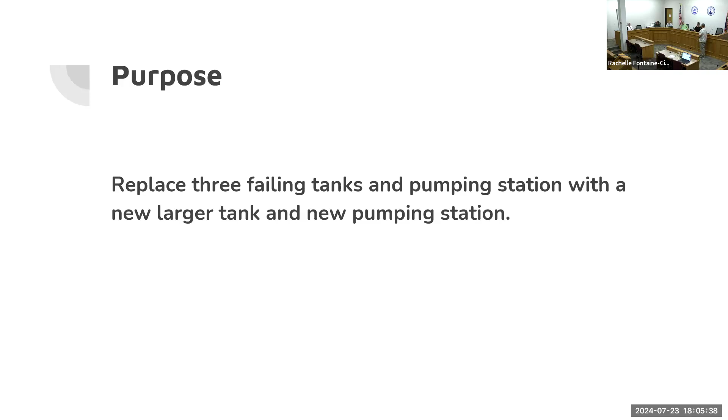That sent us after emergency funds with Wyoming Water Development, on the path of figuring out, can we put a new lid on these tanks? What can we do to keep our infrastructure intact? And ultimately came up with this plan of replacing 3 existing tanks with 1 tank, and we gained 1 million gallons of capacity by adding 4 million and losing 3.

The pumping station helps provide that backup between our higher elevation tank up by the water treatment plant and this new tank at Mortimer Lane. In between there, mechanical valves help flow and regulate pressures, and operators can manually override that system if needed. The pumping station will be automated. So if something were to happen in the hospital zone or that upper area, it should automatically close valves, boost pressure with this new pumping station, and keep that area in service.

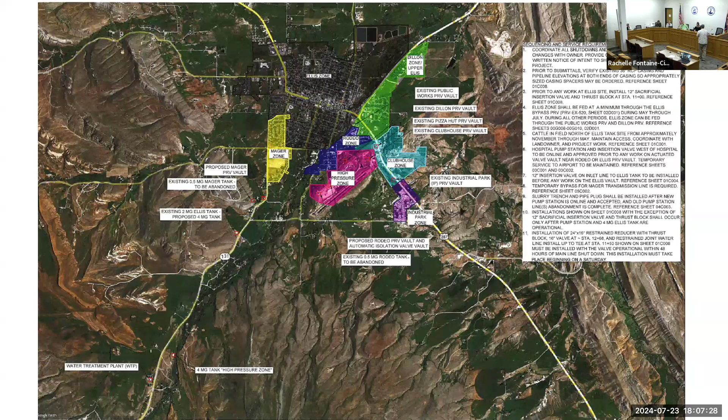Hospitals are supposed to have multiple connections to zones. Ours has multiple connections to the same zone, and that wasn't real good when we looked at it. The existing infrastructure is also a problem because it was only meant to serve just the hospital, and it actually feeds a whole large zone in that area. So just trying to correct some issues as we go through these projects. Go ahead, John.

Yep. 2-day supply, depending on time of year. Yeah, if that. And so right now, water treatment plant is making about 5 million gallons a day. And so we're using more than 4, so less than 2 days.

If something bad were to happen, we would try to call timeout as quickly as possible. That involves calling our 10 major customers saying, hey, we need you to stop. The majority of that water being consumed or used, I guess, is irrigation. So 1 to 1.2 is our consistent number that we see in our community during off-peak times. And then the rest of that is what we're putting on our lawns and public spaces.

Yeah, it is. So project scope, as we look at this, this slide doesn't show well on the TV. What we're looking at is in the far bottom left, that's where the new tank is going in. As you look in other areas, there's sections of little pieces of line that have to be built to replace sections, increase sections, keep customers in service, and automate the system.

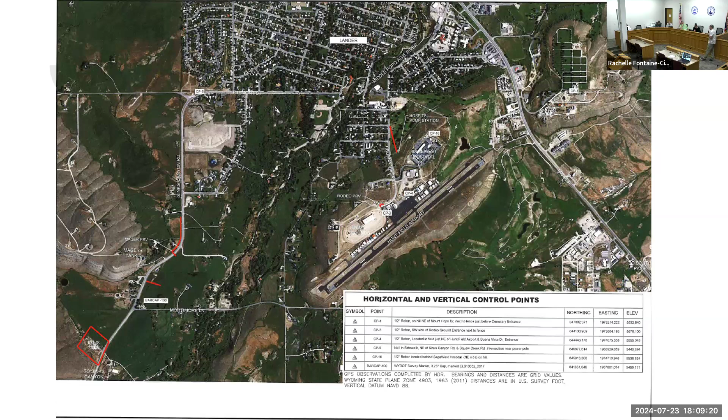So even as you look by the community center and the golf course, that piece of pipe that got bored underneath the canal is replacing old faulty pipe that we know leaks underneath that ditch in that area, and then connects back into Buena Vista near Capitol is what's happening there. And then that pumping station is sitting below the hill as you start to see the building being built.

So current construction contract price. So 9.5, that's roughly where we are with High Country to date as we're paying our pay estimates. Our grants that we've received for this project, the abandoned mine lands, 3.5 million, Wyoming Water Development is 7 million, but we have engineering fees, other things that we pay for than just construction.

And we're still trying to work through some of the logistics of the projects on connections, because we need to work with the landowner on finalizing an easement, which I'm hoping to bring to you next month to bring in another piece of the project that we have a bid on.

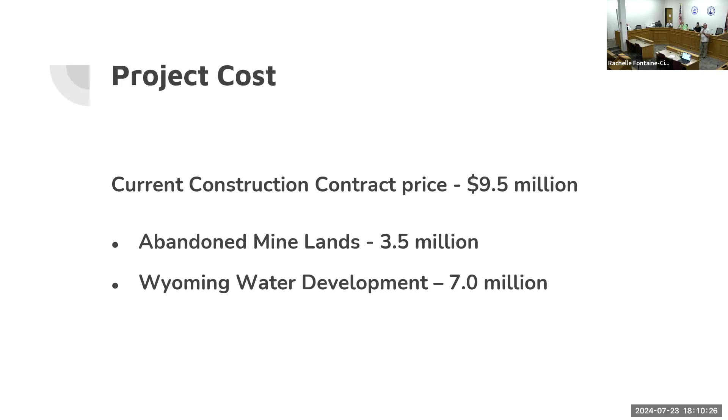So we're going to be real close as far as breaking even on this project or a little bit out of pocket on the enterprise funds between the grants that we've already received and where we'll land on the state monies that are helping us out. So pretty awesome on a project this big that we're sitting on $10.5 million worth of grant, 9.5 in construction.

And the lines coming in and out, there's valves that control when the tank fills based on elevation and controls we can override, as well as pressure valves that take that pressure from that tank being twice as tall, cuts it down so that we don't serve more pressure to the north end of town than we ever did before. So we should always be serving a consistent pressure like we did.

So doubling the height doesn't mean that somebody's calling us and saying, I'm getting more pressure on the north end of town. And the north end of town does get very close to 100 pounds of pressure. So we're always checking that, trying to not let anything creep up too high on us.

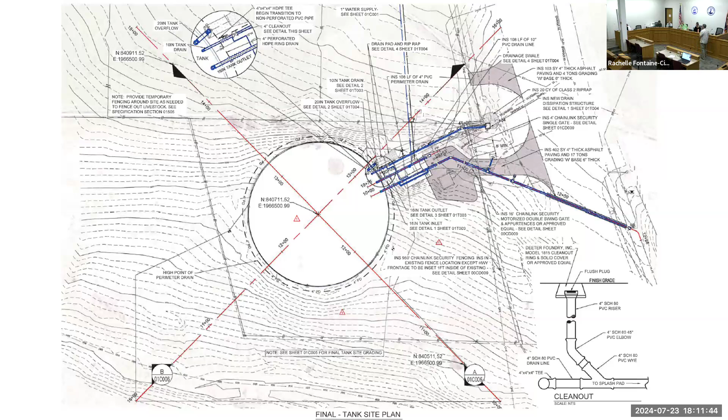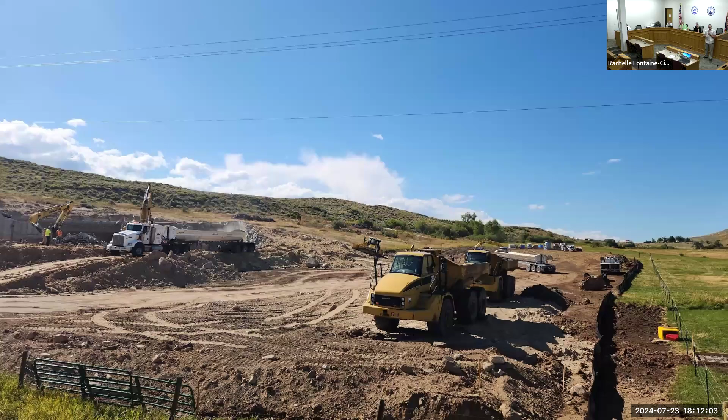So we're starting the demo. This is building the pad next to the tank. Everything has to be level. The excavation materials that were taken out around the tank were put in to build that elevated area. And the goal was to get that very flat for all the concrete pours that are coming.

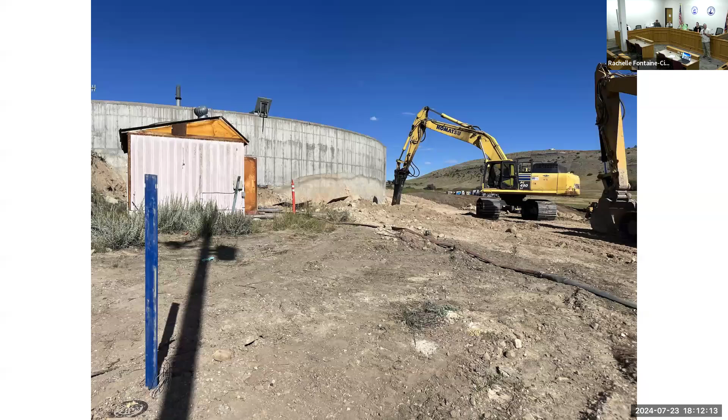So this is more of that construction. And you can see that the tank is starting to be taken down at this point. And this is the Ellis tank, obviously, that I'm talking about, but more construction and deconstruction, I guess, is the walls are coming down and we're seeing the concrete removed and hauled off.

I think that one ended up going to contractor. A lot of times those materials can be broken down and recycled. And so I don't think that they took that over the scale. I think their goal is to keep that in a yard somewhere. We offer some of that ourselves as far as our concrete pile, but this one was, I think that the contractor was responsible for it. So I can ask Chad Connell what he did with that.

So we've got our flat pad built for construction, and they're starting to import materials. The rock has been blasted out. So there were several dynamite sessions out there where they were blowing up rock and removing it under supervision and getting the area to excavate out and build the tank.

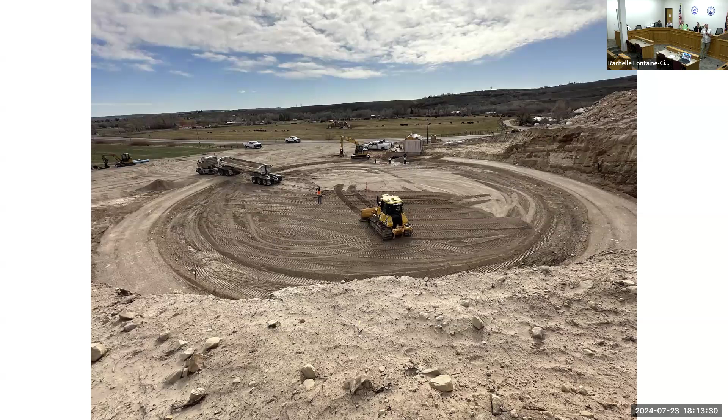And now they're importing the structural fill under the tank. Very important that that's solid and not moving anywhere. And as we see them importing the materials, they're working that into the tank design. So, we progressed into importing those structural fill materials.

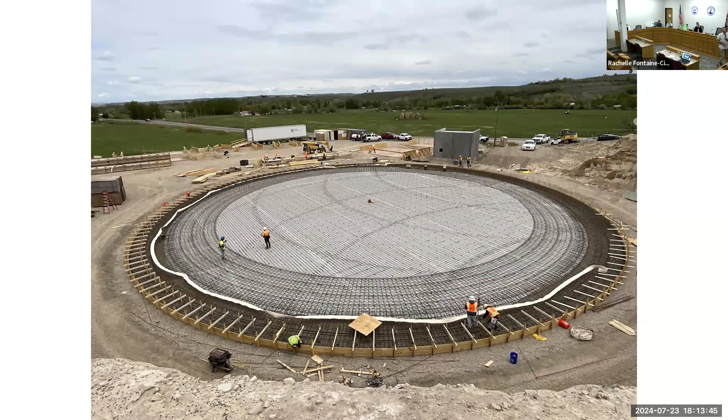This is rebar starting to be placed with waterproofing underneath it, getting ready for the concrete pour, water stop on the outside. This crew out there is amazing. I mean, it's the same group, the subcontractors, DN Tanks to High Country on this project. And it's the same guys from start to finish.

And they all know their role in each piece of what they do. It's not that they brought in concrete people, they brought in rebar people. They just brought in people who know what their role is for that part of the process. And then they move on to the next part of the process.

So we're on to pouring the floor all in one continuous pour in one day. They're pumping it and continuing to finish, moving rails. It doesn't even seem like they're talking, but everybody knows what everybody's supposed to be doing out there. Ooh, I would have to get back to you as far as the volume of that one.

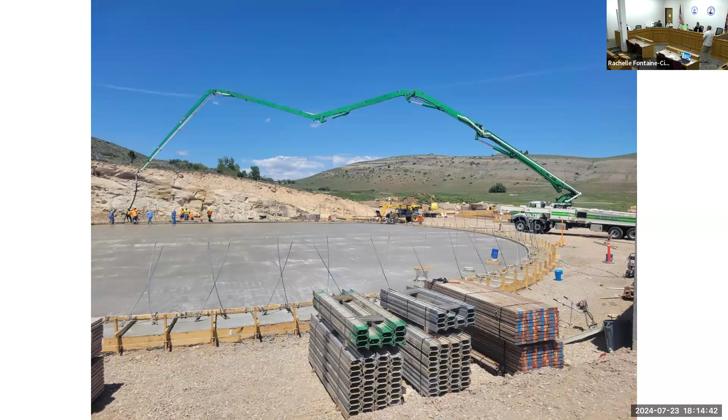So we're finishing up the pour at this point. Then they flooded it for curing, for additional strength, and to have water on top of it while it's set up for strength. And then they're starting to set up their scaffolding, and the scaffolding is to support the structure that they're going to be putting around as they work.

So you can see on the outsides, there's reinforcement strands that are going to be tied to the outside of the tank at some point, water stop, and a really impressive floor. Scaffolding starting to be put up and working through the process.

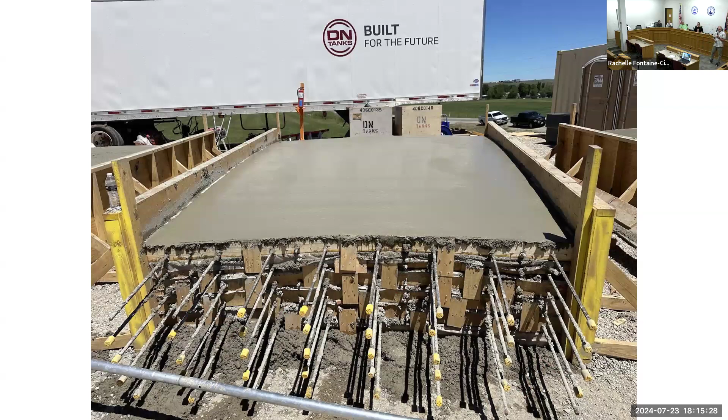So this is great. I guess I didn't really know how they were going to do this, but what they needed that level surface for was that they came in, they bought all new lumber, and then they formed out every piece that they were going to put up on this tank. They didn't bring in existing forms. They put in, shaped the bottom of the pour that they wanted to pour, tested it out.

And then you can see the yellow on this box. Well, that's a portion of the roof that they want to keep an idea of what it is. They pour the first one up to a certain elevation that's marked out on the boards. It's reinforced. They tie the next layer of reinforcement for the second one, and they're just stacking one piece on top of the other and building the same piece over and over and over again.

And they're tracking each thing that goes into the place; they know by the color when they get the crane in where that goes. And so these are set up all around the site in different places, of different sizes, with different knockouts, different purposes, and did everything on site as they're putting up forms and doing other things. So there were continuous concrete pours going on almost a daily basis of pouring another level once they were ready.

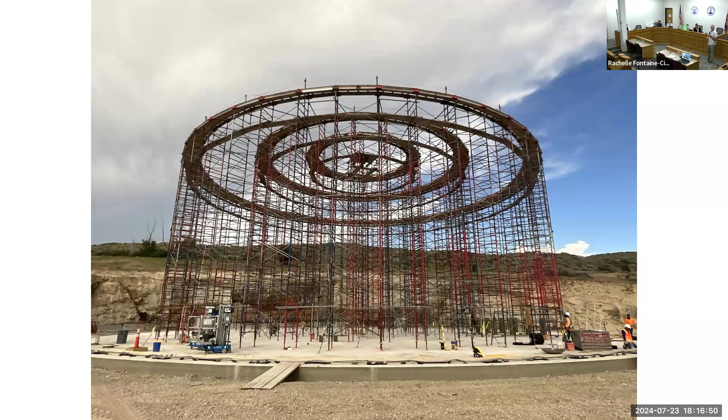So this is the scaffolding that's up and ready for the crane to start coming in. And this is them taking those pieces after they've cured and starting to use that crane. I think you guys saw that giant crane come to town, probably the biggest one Lander's seen, I would imagine, or at least to my knowledge.

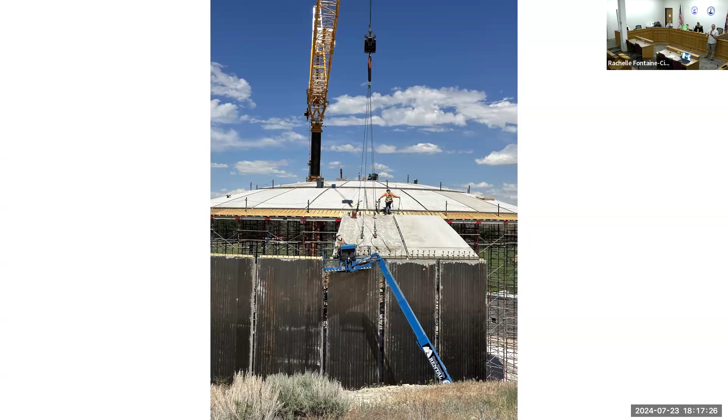And they're building the sides, placing them up piece by piece, and then putting the roof, leaning on top of the scaffolding as they go. And there's small gaps in between each piece that they'll come back and address later, but just laying out like giant Legos sitting on the structure.

I think that crane came in 3 different trucks, and the counterweights to reach the distance that it does was pretty amazing. We were told after we bid this project originally that there was going to be significant savings if we had worked through getting an easement by the tank contractor. Well, the tank contractor is only one piece of the bid, whereas the site work and everything else that happens there comes into a total bid.

So when we put this back out for bid, we did it as an alternative because we thought maybe we'd have to buy an easement, depending on how much money would be saved working with the property owner to be able to use a much smaller crane and be able to work around the tank more, or using a big crane.

And that's where we got down to that like $10,000 difference of not making it worth our time to go purchase an easement for this project. But it was amazing how tight that was when this crane is, I think, $1,000 an hour is what I was told, the subcontractors billing them. So they were very motivated to get this off of site before the 4th of July. So they were told they couldn't go home until all the walls were up and every piece was set.

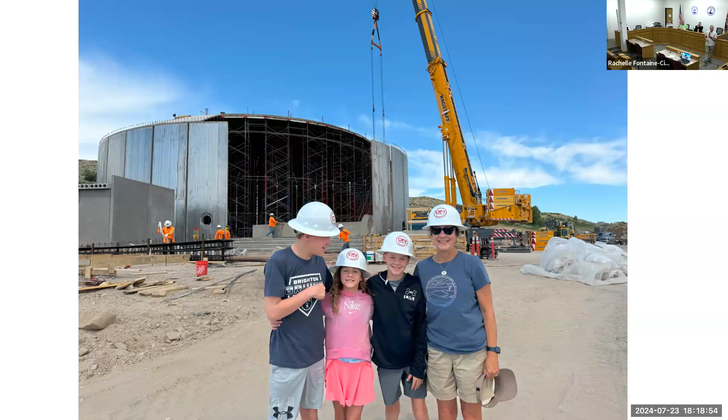Yeah. Yeah. And the contractor's been great.

This picture is my 2 kids, my mom, and then my nephew Garrett. And so I was able to take Garrett out here. He loves things like this. And I think it was the highlight of his 4th of July visit was to come out here. So every time I talk to him now, he still asks about the project. Deanne was great to let us do a site visit. And I don't know if I'd be in Lander if it weren't for Garrett and some of the family things that happened to our family. So pretty awesome to share something like this with him.

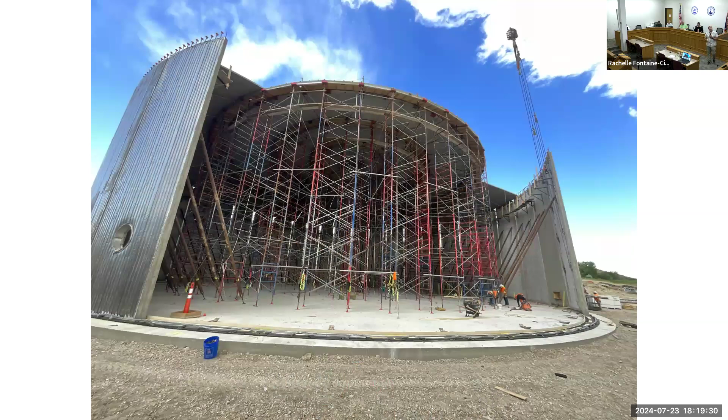So we're still putting up pieces. This is inside. So I didn't get to take this picture, but the engineer did, as far as what it looks like with all that structure and all that roof structure placed.

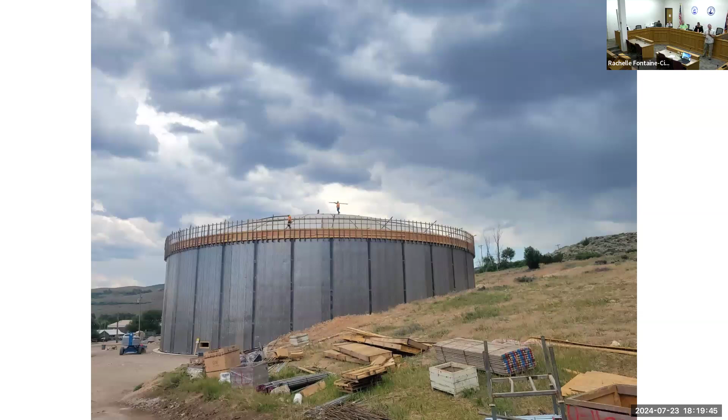Go ahead. No, you asked away. This is what this is about. Yeah. Yeah. Yeah. Oh, yeah. I mean, okay.

As far as safety, security, and all that weight on top of it, it's amazing, and at this point, they've put up and they're sealing the joints. They're getting ready for the upper pour. So they're going to start pumping concrete in all of the joints and all the pieces and in between them. So that wood structure around the outside is safety, but it's also holding a concrete edge pour. And then as you look at the metal, it's epoxied down in between each vertical piece. But then on the inside, that's secured and bolted, and then that's ready for filling in the gaps. So they're filling in that structure as they go.

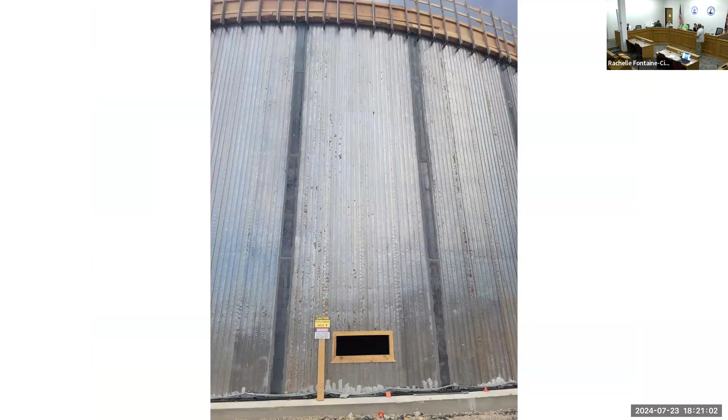And I'm like, how do you get all that scaffolding out of this? Like, I just see the small holes and the penetrations, and they're like, yeah, that's this. And it's the perfect size to take that all down one piece at a time and pass it through the hole. And I'm like, oh, that's going to be a fun day of passing those little pieces of scaffolding outside, stacking it back up, and they'll seal that hole. So that's kind of where we are with the tank right now. And I guess I can talk a little bit more about what happens next.

So as they fill in all those voids, there's actually a bunch of wire wrap reinforcement that goes around the outside of that tank. And it's going to be gauge wire tied into the reinforcement that's there. And then it's going to get shotcreted and painted to finish it all up. And then sealed on the inside. As far as what's going on, they were going to do one more pour to keep sliding from not being an issue against the tank in the back before they backfill it with rock. So we'll see them remove that pad and stack everything kind of back up.

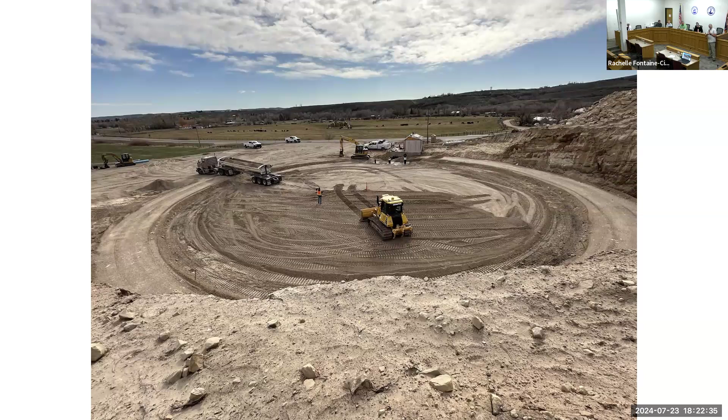I guess some of what I may have missed was the little building in the background here that was being built too. So we had an existing building. There it is. You can see it. It's up in this picture. It's wood structure and it's over a vault. And then we're capping that. It is half underground, half above ground, and we're doing a full building over the top. So they're retrofitting placement walls on that.

And then that will be where we operate this facility out of and where all the valves are and testing for chlorine. And our day-to-day operations will be in that small building that's over the valves. As you see it go up in the back there, pretty awesome. That was just pre-manufactured pieces that were placed down as well. There's roof pieces that go down and then they pour concrete and seal that up in a similar way that they're building the actual reservoir.

I tell you, those guys, Lance, really know what they're doing. I've been really impressed with how that tank went up and what they're doing. I mean, there's no talk. I don't see any talking out there when they're doing stuff. It's just automatic, like a machine. They know exactly what their job roles are. They really like Lander and the people of Lander. I think people are treating them very well as well, which is great to hear.

Well, we want more water, so more storage. Oh, no. Look at that, how we're doing it.

So once this tank is built, let me walk through this next step of the process. This pumping station that we're building is really important as well. And there's phasing to the project of certain things that can and can't happen until this pumping station is built. A lot of that is when we fill or backfeed customers or put in upper zone infrastructure like the control valves, we can't do that portion of the project right now without interrupting our only feed to the

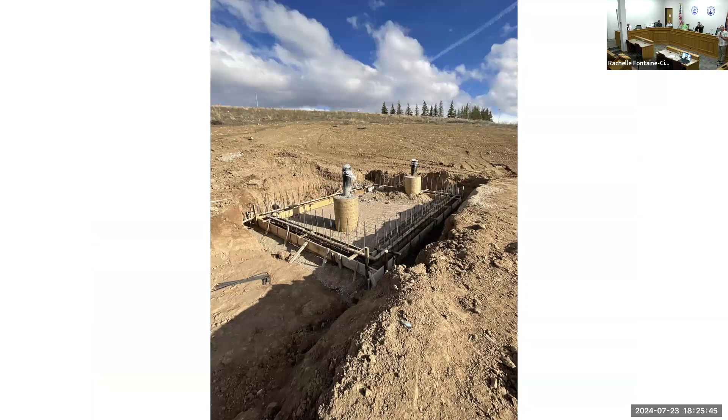So this is the pumping station below the hospital hill. It got excavated. We're looking at the materials in place for the substructure and then getting ready for the concrete pour and the walls. The piping that's coming up, one side goes underneath the canal back towards where the low pressure side is. The other one goes by the canal where the high pressure is in that area. The reason we picked this area is because both of those zones are close together at that point.

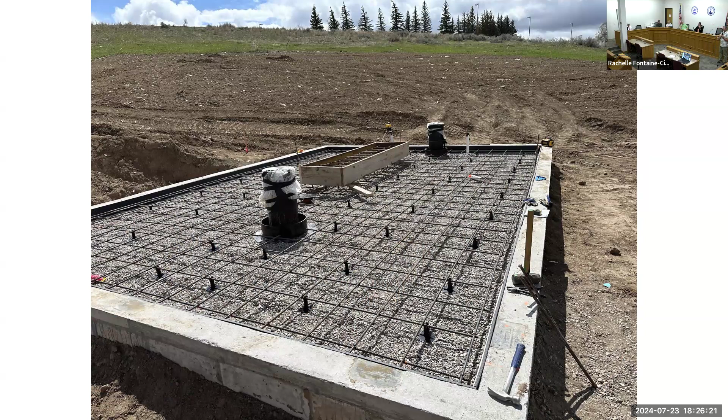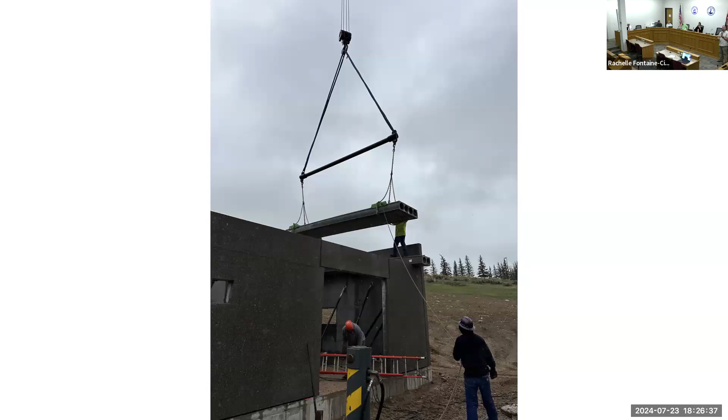So this is where we brought up the grade. It's getting ready for pouring platforms for the pumping equipment to come in. So they poured the floor at this point. It's curing, and now they're setting the building. So it's kind of what you see up there today. Walls are being placed. It's being welded in place. The roof structure is going down one piece at a time. They'll pour on top of that.

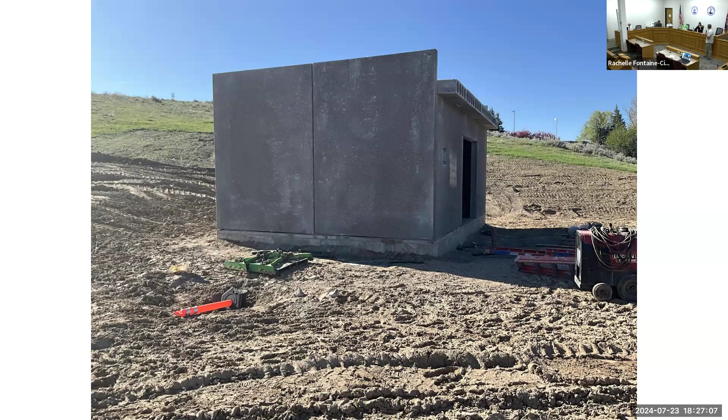But the pumping skid is still moving back in time. It's one of those items we worried about from the very beginning of the schedule, like what piece of equipment's going to be a problem. They said, no problem on getting this to you. It was supposed to be here at the beginning of the summer. It keeps bumping back. Now it's mid-August that it's supposed to be here, and that's still controlling a lot of this actual project schedule as far as when that equipment can be installed.

So that's 4 different pumps. It comes in on a skid like that, and it can keep up with every bit that we can give on the 12-inch line that feeds it. So it's got essentially the equivalent of a 12-inch full capacity line as far as volume.

And as far as what we're serving on that, we have the hospital zone, but it also goes out to the industrial park. And then that goes up to the cemetery. So everything that's up on that hill from the rodeo tank over and down is where we're at. So we shouldn't ever need more than 1,500 gallons per minute as far as demand on it, but it'll keep up with fire flows. So if we need to open up 3,000 out there, it'll do it.

Yep. And they operate based on sequencing, and then they rotate through their cycle as far as what's lead and lag, so that it wears equally essentially and has backup. This one's kind of fun.

So, as we start to look through the system, we figure out what we can control and what we can't control. Realize we wish we had valves in certain areas that we can't turn off and we shouldn't turn off, or we're going to knock a large portion of customers out of service. So this is putting a valve in live. They've got an apparatus that clamps to the bottom of the pipe, the top goes around, and then it cuts a hole out. And then we have a valve where we need it to gain control.

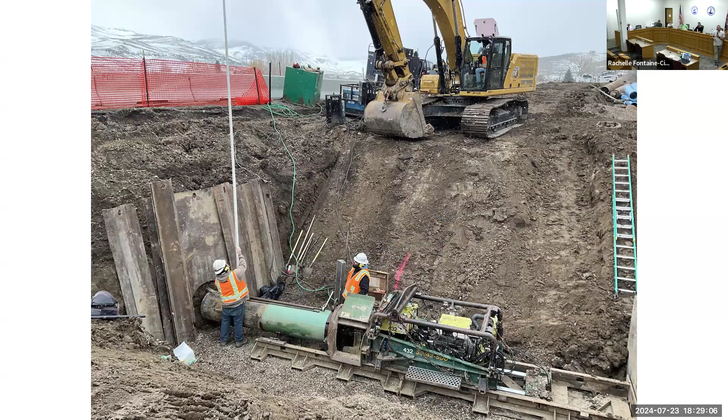This is the Mortimer Lane bore. So we had to put a new pipe where we talked about that pressure reducing valve, where we're replacing the tank on the hill, below Mortimer Lane, the tank that you can never see. It's Mager tank, if you know where that is, but it was on the old Bill's property in that area. And so the PRV vault needs to be placed alongside the highway and is going to replace that tank. So we'll take that high pressure, tap into it, cut the pressure, and serve the same downstream pressure in that area.

So this is as we push the casing pipe and they weld more and then keep pushing on these rails. They get the casing in, and then they can come back and push the plastic pipe inside that casing pipe. And now we have water line inside of that. If anything happens, you can remove that pipe, put a new one in, the metal pipe. So that's kind of the tank and pumping station project where we are to date. Maybe a little bit behind schedule based on materials, but as far as the tank goes, right on schedule where they want to be. Do you guys have any thoughts, questions? You want to talk? Yeah.

Will we be good, or do you see more storage in the future? We had to convince Water Development for our grant that this is more storage than is needed in the equations for a town our size. So we have more storage than what's necessary, so we have some growth for quite a while that we should be able to sustain. Our point back was we live in remote Wyoming, and if something happens, it's exactly what John said. We only have so much time of capacity to get something fixed and get pipe here.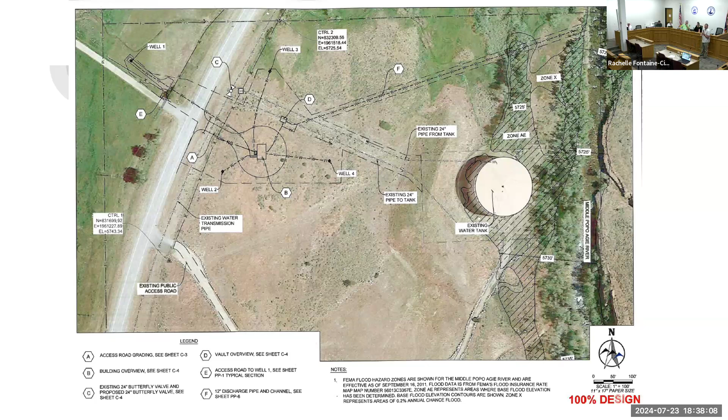So this project, when we started off, getting approval for it, moving forward, getting a grant through water development, we had $1.5 million of estimated costs, what we thought that would be at that time. Right now, we're a little more in line that we think this is going to be a $4 million project. And the reason we're bidding this right now is to get that cost from contractors.

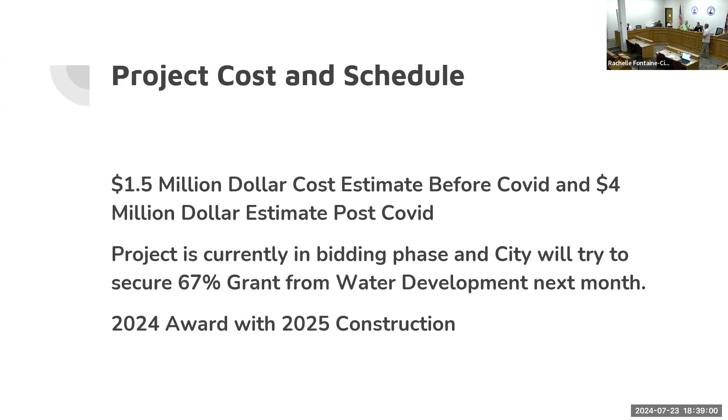There's a meeting in August with water development. They have said that there are contingency funds available for us for that increased construction cost if we're in that window. So we're hoping that we're within that $4 million, give or take, and that we can get additional funding to move on this project still end of this year, getting parts ordered, and then construction next year.

Okay, anything on that last one? Yes. Yeah. And we still have our eyes on some of these ARPA funds, trying to figure out what's going to be available, what type of projects they're going to award those to. But if there's additional funding at all to bring down our actual local cost, we'll keep an eye on it and apply if we're eligible.

So Lander sidewalk improvement project. So this is around Gannett Peak. So we're trying to improve the accessibility and safety around the elementary school. A lot of places that don't have sidewalks, not ADA friendly, traffic issues, access issues. So we started out with a nice rectangle, hoping that that would cover all the things that we wanted to do around the elementary school.

Went out for bid with this project, quickly found out that our grant of $500,000 wasn't going to cover actual costs. We bid this one, had one contractor who was interested. It was a $1.5 million bid, but they didn't meet the DBE requirements WYDOT has for this grant. So we've pared this project down.

Here's our scope and all the streets that we were trying to do, to a much smaller area, kind of cherry pick the most important pieces and the pieces that aren't part of other infrastructure projects such as Cascade and Fifth Street that we're working on or have other funds for and have designed for. And so we focused on kind of that Sweetwater, Seventh, and then the entrance.

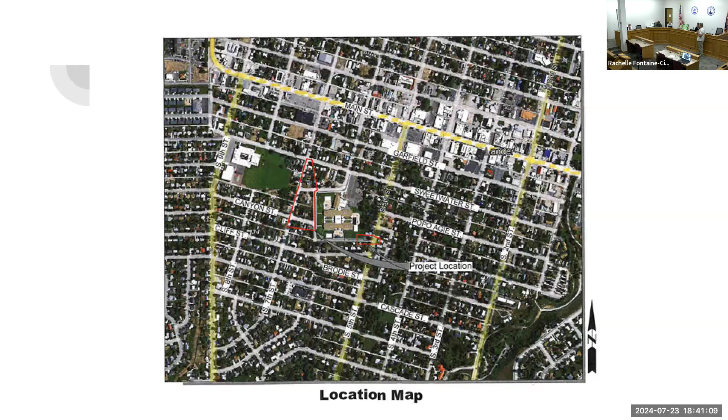So we're back out for bid on this project. We had a mandatory pre-bid. We only had one bidder who showed up again. And we called contractors and said, hey, what's the deal on this one? And they're like, we'd be more interested in November. And so we've hit pause on this because this is next year's construction anyway.

We're going to change the bid date to later in the year. And then we're going to do another mandatory pre-bid and see if we get more interest. But we really want to see competitive bids on this project, at least 3 different contractors who would be interested, if we can get there. But when you have all these big projects going on, all the ARPA funds that are out there, infrastructure money, these smaller projects aren't necessarily as appealing as some of the bigger ones.

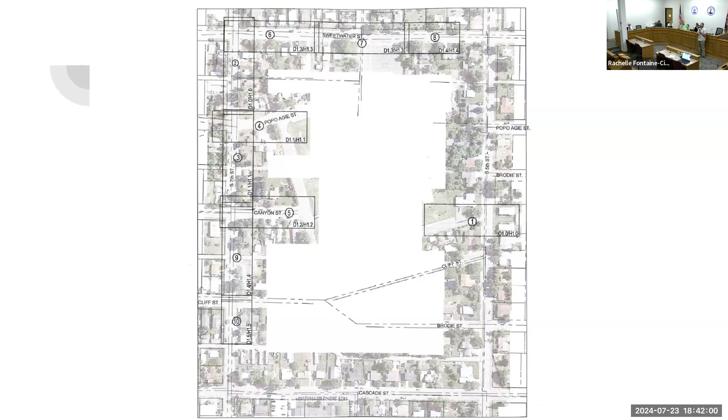So Lincoln Street, we're almost ready to finish our agreement and contract to get that one going. I think that the contractor at this point is interested in doing some repair work for us this year. I'm not sure that they're going to dive into full-on water line, sewer line, underground work still this fall, but they have that ability. So if it meets their schedule, which is High Country, who were saying, hey, you can postpone some of that work on the tank.

Maybe you have another project that you want to tackle, where First Street freezes up on Lincoln Street for us, or 9th Street on the other end, or where we're seeing constant water line issues, or where we know there's bad sewer lines. So we'll have our pre-construction meeting. We'll kick off with them and get a more detailed approach of how they want to tackle this project. But the majority of the construction, I'm guessing, is going to happen next year rather than the end of this year, just based on their schedule and project timing.

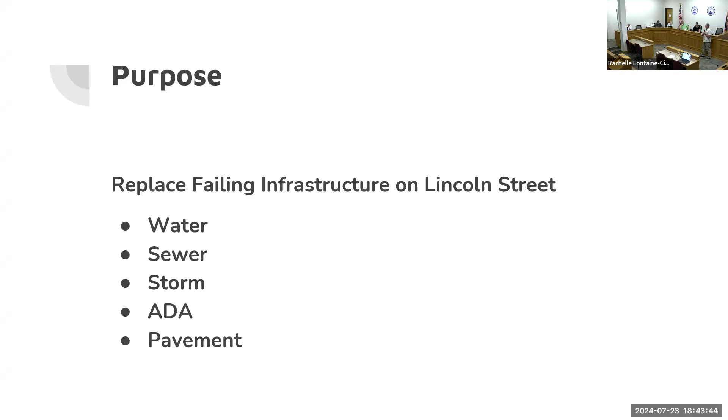So Lincoln Street: water, sewer, storm, ADA, and pavement. It's not complete replacement. We left anything and everything we could to try to lower the overall project cost. And just to give you guys an idea, the overall bid was 7.2 million, and we're talking about 9 blocks. So pretty expensive as far as infrastructure goes to take on these projects and to find the monies, even when you're trying to salvage as much as possible to get things fixed.

This was just a design piece, so the blue is the water line, the green is the sewer line, and just the different components. The yellow is just the sidewalk portion that we're replacing. The white is curb and gutter and sidewalk we're leaving. Each sheet was evaluated with that same thought. Any place we could line versus removing sewer, we kept it in, and we're just going to put liner inside the sewer. So this isn't a full-blown, go through everything new project. This is still trying to be somewhat conservative, and construction costs have really changed from 5-7 years ago to today.

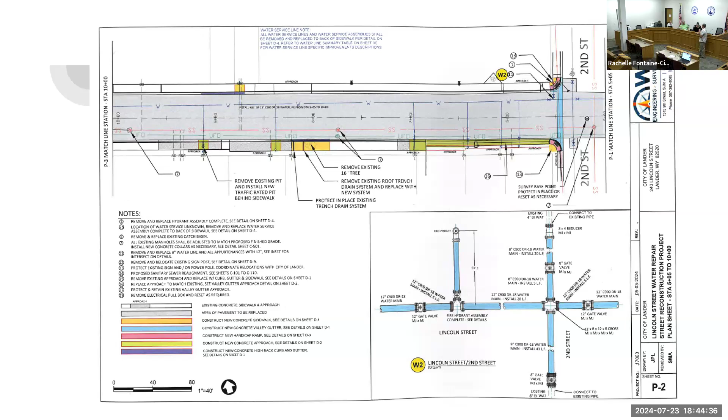The sewer is in place, so it varied throughout there, but there's collectors going through different portions of that. And so a lot of 8-inch sewer in there, but you're getting those collectors up to 12-inch and bigger, depending on what's running through, like Fifth Street, Second Street, Third Street, those are bigger lines. So the engineer's cost estimate for construction was 5, the bid was 7.2. We're awarding this, and this was our one ARPA project that we were given when we applied for the 9. And so we think that there may be additional funding for this project, and they're talking about awarding that to the different agencies that are under contract. So we're going to get under contract.

We don't want to use too much of the optional 1% money. If there's some value engineering, we need to go back through and reassess this project, see if there's any savings talking to the contractor. We can do that. But I'm hoping that there's more funding to take off some of that local burden so that we can use more of that optional 1% on the other 9 projects that we're trying to get done as well. Because if our match is used here, it lowers how much we'll be able to get done in the future. So still just trying to figure out what we can and can't do, and trying to get the best bang for our buck, I guess.